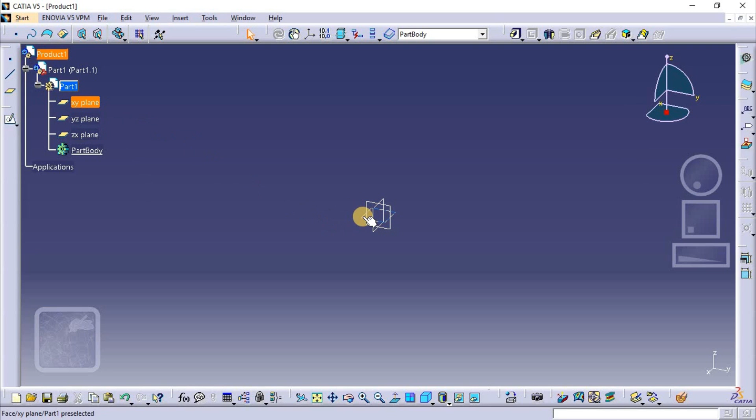There are different planes being displayed on our workspace. For creating a model, first we need to select a plane and draw a 2D sketch of our model from any point of view. Select the plane and then click on Sketch in the Sketcher toolbar option. We enter a 2D view of the plane that we selected.

Select the circle under Profile toolbar. Click on the origin, this will be your midpoint of the circle. You can create a circle by simply moving the cursor or by entering the radius manually. Let the radius of this circle be 45.

Many times the dimension of the sketch gets too large or too small. Use the command Fit All In under View toolbar to get a more accurate view. Now let's draw another circle which represents the hole in the gear body. Let the radius of this circle be 25 mm.

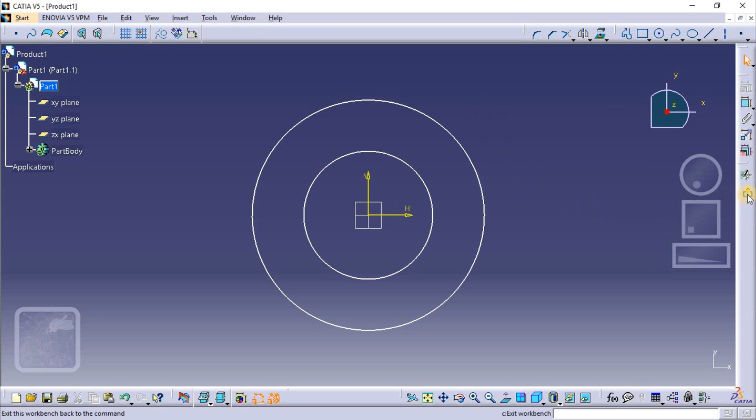Now click on Exit toolbar option under Workbench toolbar. This throws us back into the 3D view. Select Rotate command under View toolbar. Press and hold left mouse button and move your cursor to view the sketch from different angles.

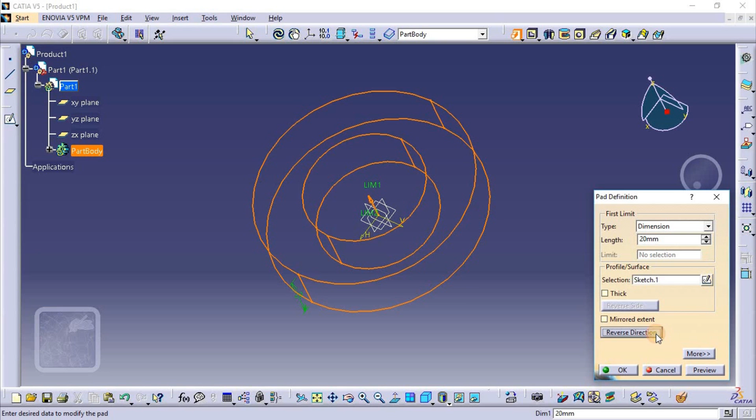For converting your sketch into a model, select Pad command under Sketch Based Feature toolbar. A pad definition box will open. Here you can increase or decrease the length of your sketch or even manually enter it. Click on Reverse Direction if you want to pad your sketch in the opposite direction. Click on Preview to generate a preview of your model and then select OK. Our gear body is ready.

For making gear teeth, select the same plane and then click on Sketch. Select the circumference of the outer circle first and click on Project 3D Elements under Operation toolbar. Select the Line command, click on Origin and move your cursor to provide length to your line manually, or you can enter the length under Sketch Tool toolbar.

Let the length be 55 mm. The blue color shows that your line is at 90 degrees to the origin. Take the Line command once again and draw a line from the top of the previous line, joining the circumference of the circle. Let the length be 20 mm.

Since the line is a bit long, we will use the Quick Trim option under Operation toolbar to remove the excess portion of the line. Simply select the command and click on the excess portion that you want to remove.

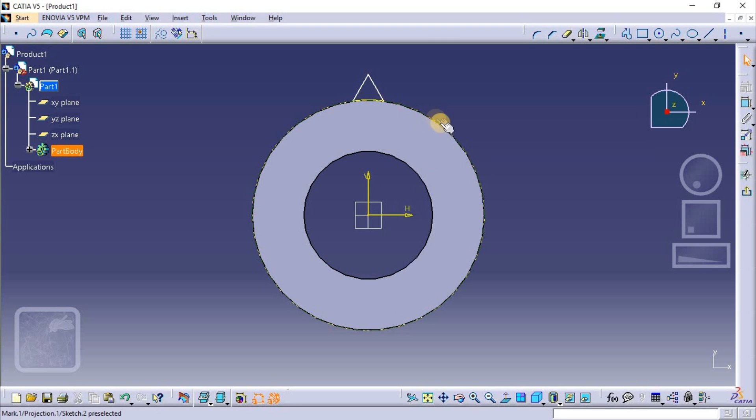Now exit the workbench. It's time to pad the tooth profile. Click on pad and click OK.

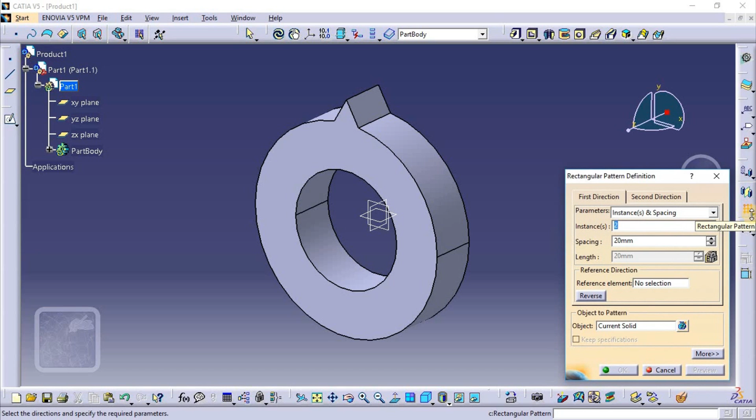Now select the circular pattern under Transformational Feature toolbar. This will help you generate a number of teeth in a circular pattern. Under the parameter, select instances and total angle so that you only have to define the total number of teeth you want and the total angle. Suppose I want 24 teeth and the total angle is 360.

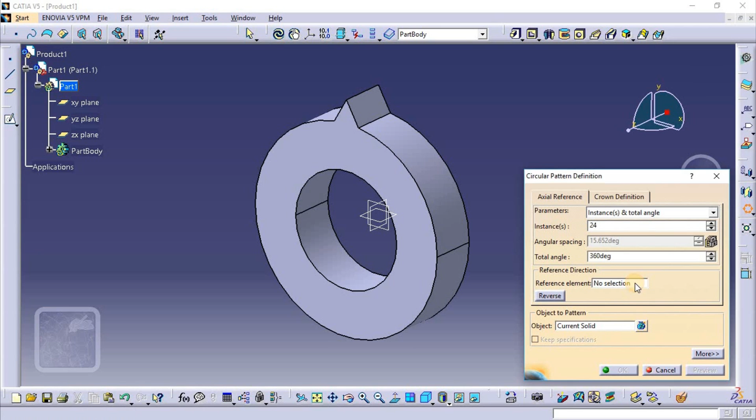Select the gear body as your reference, so that the tooth will be generated around this body. Click OK. A warning message will appear on screen. Simply click OK to remove it.

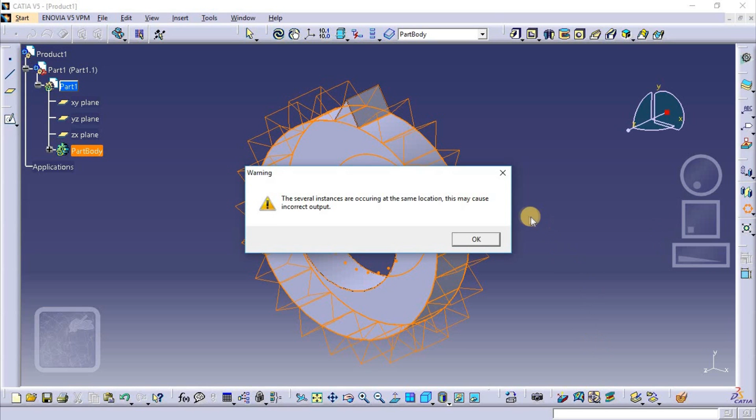So now your gear is ready. Select the rotate command and move your cursor to view your gear from different angles. As you can see, the face width of your tooth are pointed.

You can make them round by using the Edge Fillet command in the Dress-Up Feature toolbar. Since the Dress-Up Feature toolbar is not visible on my workspace, go to View menu and click on Toolbar, then select Dress-Up Feature toolbar. It appears on the workspace.

Now select the edge and then click on Fillet. Let the radius be 2.5. Click on OK.

Also, you can select multiple edges at a time and fillet them together. Select the edges using Control and then click on Edge Fillet. Specify the radius you want and then click on OK.

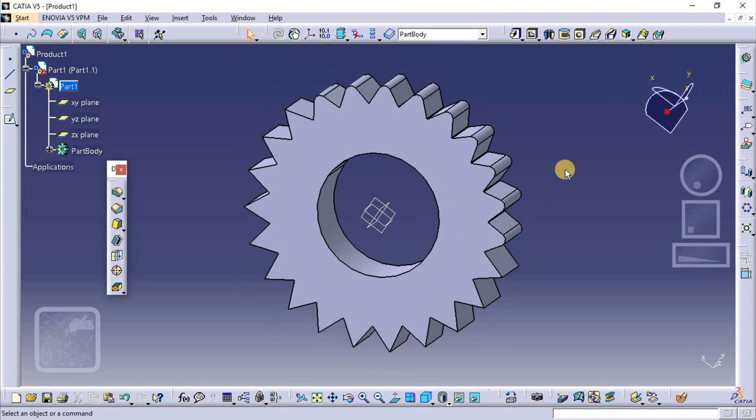So if at any point you want to undo your last step, simply press Ctrl plus Z. It will undo your last step. Your spur gear is ready. Thank you.